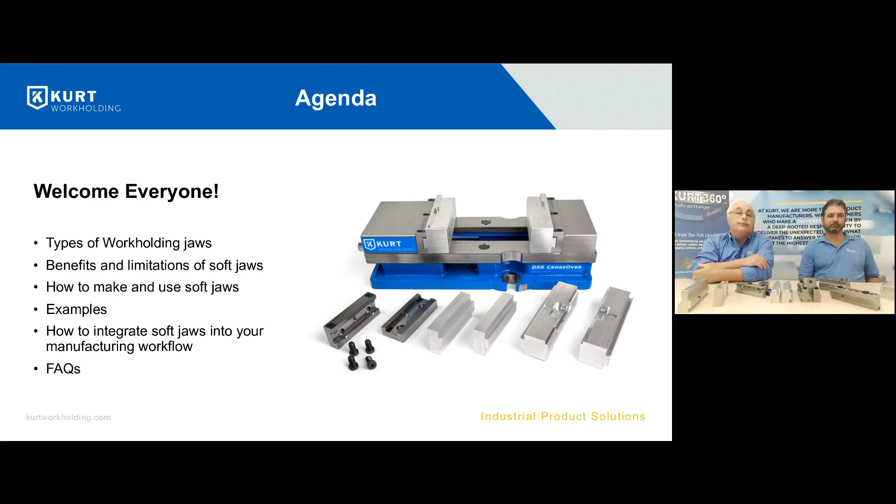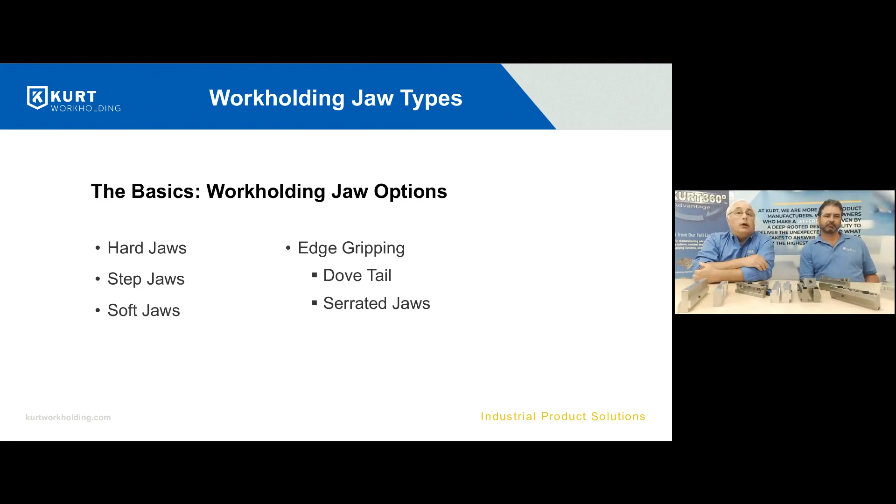So we'll start out with workholding jaw types. There's hard jaws, step jaws, soft jaws, edge gripping jaws, dovetail and serrated. In the next few slides we're going to go through and talk a little bit about those.

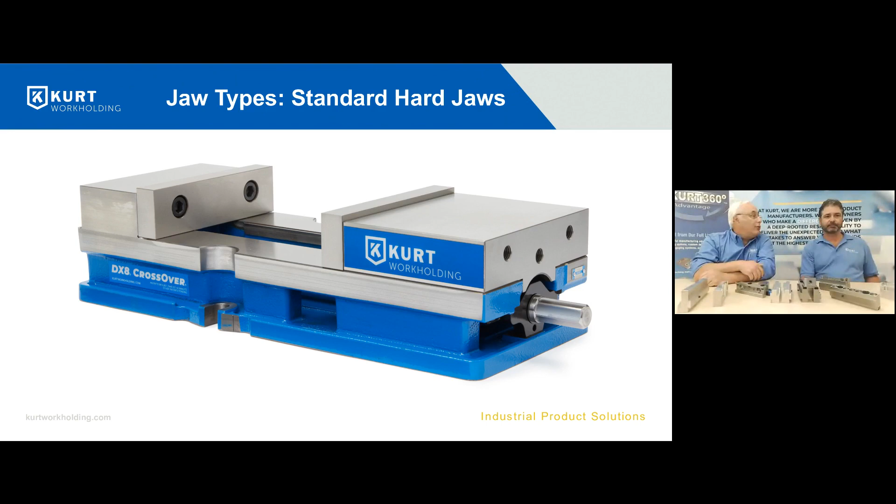First off is the standard jaw. It comes if you buy a Kurt vise, or a lot of different types of vices come with these style hard jaws. That's pretty standard use tool room, job shop type jaws. Most of the time they're used in conjunction with parallels. You'd set your part up on a set of parallels, and you would use some type of work stop system to stop your part left to right in the vise. Maybe square work for that kind of stuff. You necessarily don't need to use the parallels. You can drop your part right down on the bed of the vise, as long as you're not drilling through the vise or something like that.

So then the next type of jaw is a step jaw. We sell these style jaws. They're hardened just like the ones you get with your standard vise. The benefits of these are that the step is built right into the jaw, so no parallels. Parallels are kind of pesky, they tend to tip over, and you have to clean underneath them. There are things like parallel separators that we sell that hold the parallels against the jaws, and that helps, but it's still not as good as a step or a carved soft jaw. With parallels you always got to worry about getting something underneath them, where with something like this, you really don't have to worry about that. You still got to put a stop on it, left to right.

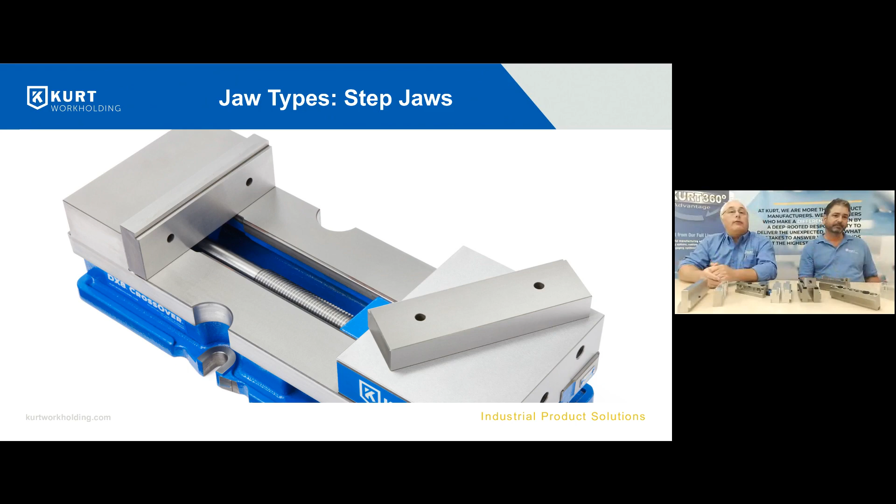Here's edge gripping - I'll talk more about this. We've got an example of a part I made in a process where we started with edge gripping, and dovetail gripping has become more popular. CNCs - I started this where we used to square up material, square up blocks. If you can grab onto as little material as possible and machine 5 sides, you don't need even a 5-axis machine to do it. Even on a vertical, establishing those 5 sides and getting the most critical features in that first operation is ideal.

Get your material a little bit bigger. You're seeing more and more of this. I'm going to show you an example - there's a picture there of edge gripping.

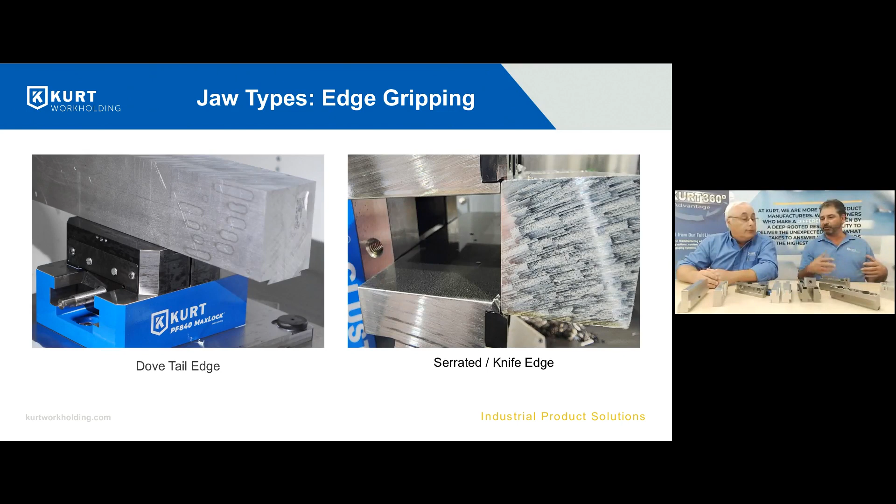That's a Talon, Mitee-Bite Talon grips, where we're grabbing into aluminum only a 1/16th of an inch. On the left-hand side, you see a dovetail prepped in one of our PF 5-axis vises. When you do the dovetail prep, it's a much stronger method - you can break tools before you rip the part out. But if you can get away without prepping it, and you're doing aluminum, that's ideal - it saves a step. On the right there's the serrated or knife edge, and then the dovetail. So I made a part and went through a process we'll show, demonstrating the dovetail end of it.

So let's talk about jaw type, soft jaws. This is a standard double lock vise that we sell. You can buy it with aluminum jaws, cast iron jaws, or hard jaws like you saw in that first picture. The CarvLock even integrates jaws directly into this vise - that's a new soft jaw vise, high performance for that one.

Anyway, with this vise you would carve those jaws to hold your part, be it round, square, funky shape, whatever - like carving a nest for your part. You see a little rectangle cut on the 2 movable jaws.

That's the no-carve zone - you can't carve into that area because the workings of the vise are underneath there. But that whole area all the way around, you can cut into to hold your part. So if you've got bigger parts, like 2 bigger parts, you can cut right to the middle of that and right to the outer end. The no-cut zone exists because we're pushing these jaws above the bed of the vise - that reduces jaw lift. If you push below the bed of the vise, you get more lift. So that's why we do that.

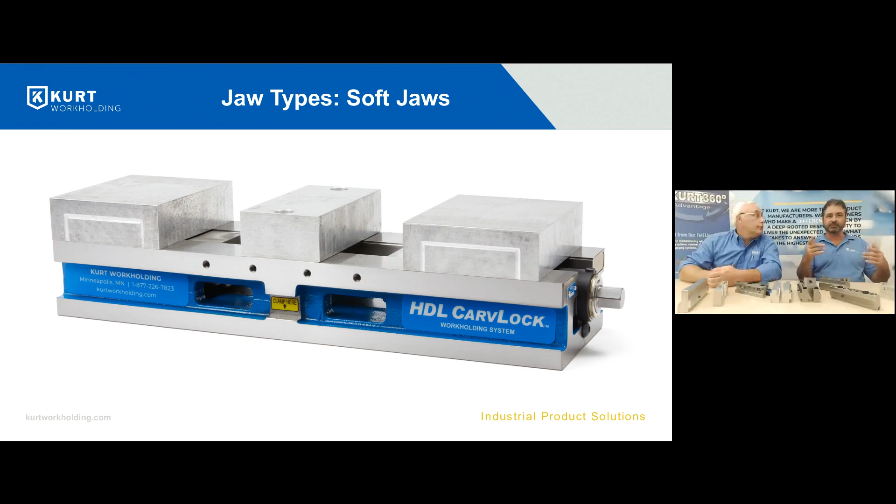Here's a picture of CarvLock Master Jaws, this is off of Instagram. Back in the old days, for round parts you'd get an indexing head, a 3-jaw chuck on your mill, or a collet closer. Now that CNCs are more widespread, you can just interpolate a round in a vise and clamp onto it. It's slick.

Soft jaws are a custom fit between your vise and your part, and parts aren't always square, so soft jaws are the way to go.

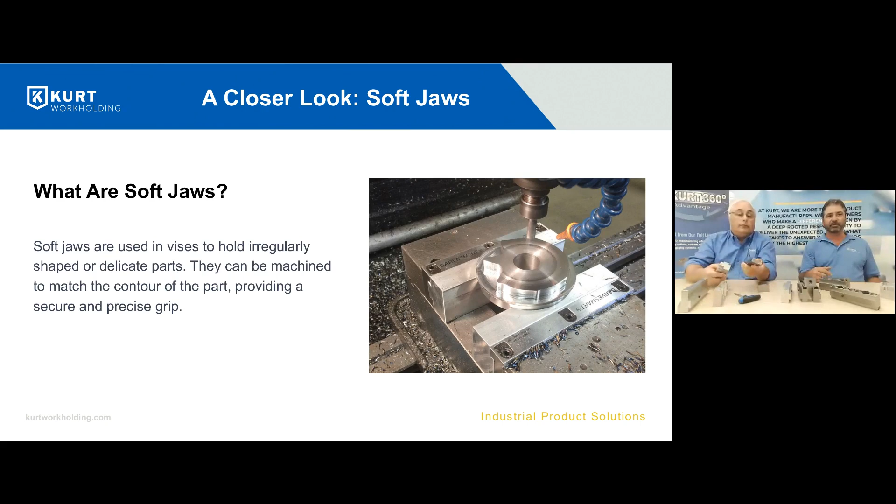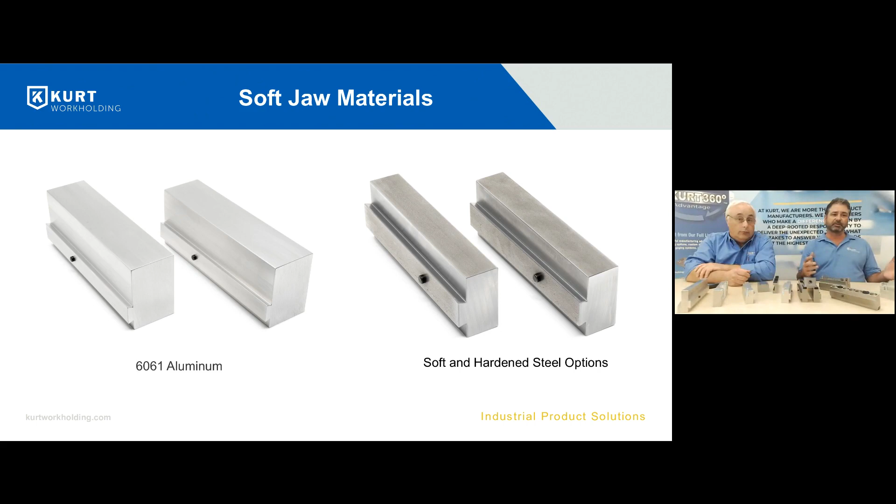I'll demonstrate that for you - I gotta loosen this up a little more. Here we're showing soft jaw material. Depending on what kind of part you're holding - aluminum for maybe a short run thing, steel, hardened steel - all different types of materials. It all depends on the type of work you're doing, and we'll show you some examples of that.

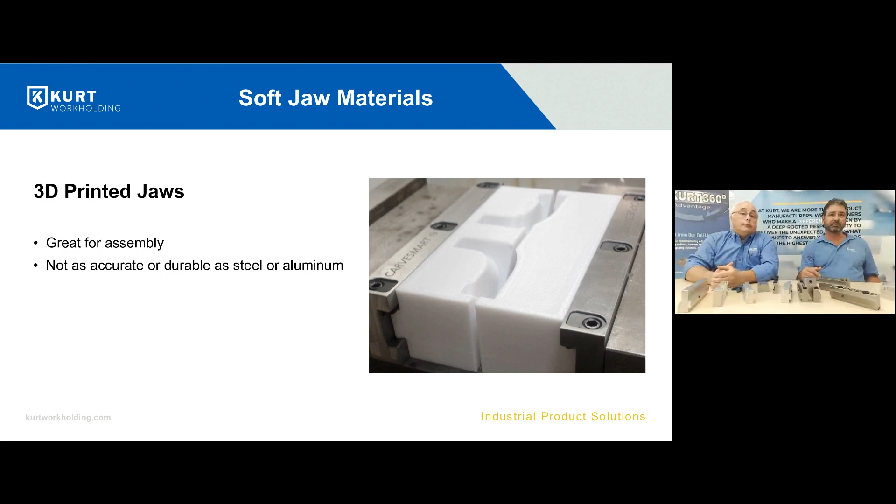When should you use soft jaws?

Not every piece works with soft jaws - if you're doing plate work there are reasons not to use them. But for even step jaws, I use soft jaws all the time, so that's why I'm a believer. Short run, long run - if you've got thousands of parts, obviously you look at custom work holding. But for prototyping, short runs, medium runs, soft jaws work great.

Even when people say this is going to be molded eventually - well, if it's going to be molded, it's usually not square, and they want prototypes, so you make them anyway. Here are some examples of hard parts to hang on to.

Simple ovals - that one on the right is a big blade that sticks way up in the air. You've got a good grip on it there, so it's a good way to machine a part like that. It's a tough profile too, coming out - it'd be hard to hold that in just a set of standard jaws.

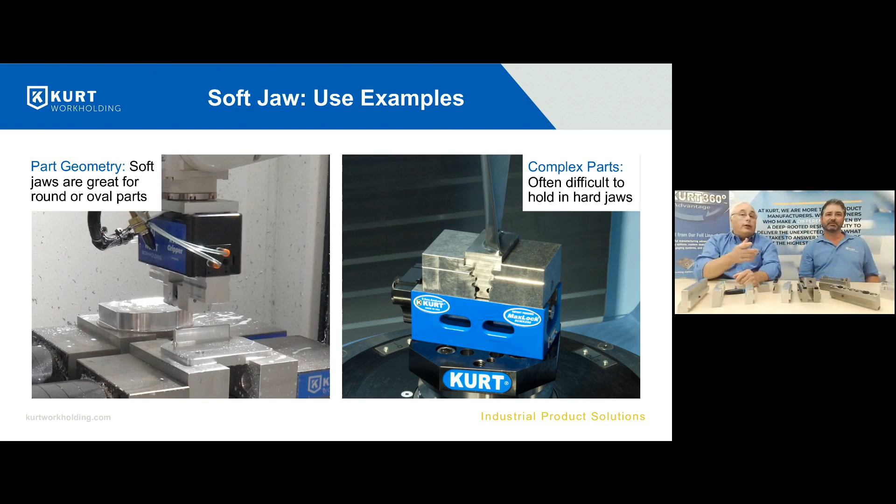We're going to talk more as we go about material for the jaws and so on, so we'll discuss that a little more.

This is a good example of the old school parallels with hard jaws and a work stop - I hate that setup. The one on the right is, of course, to make your soft jaws and machine the stop in there. The stationary jaw should have the stop built in laterally, left to right. I've got that right there - you can kind of see where we'll talk about relieving the corners in a few slides. But you can see the old vice and then the CarveSmart integrated system on the right, which is a great way to do it.

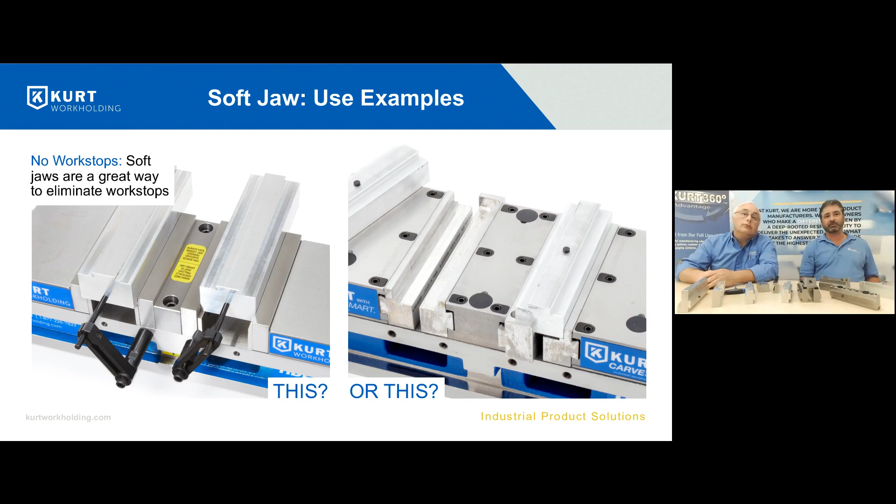I like that the work stop's built in - it's a positive stop every time. No chips under parallels, no chips, and it's easy to blow off the stop.

It works great. So I made a clamp here, and we took pictures as we went of how we set it up. These will end up being investment cast, or we wouldn't have made them this weird shape, but it made for a good example of how to cut soft jaws.

I've got a 300 millimeter Kiwa horizontal with a 4-inch cluster tower on it, where we put the CarveSmart Master Jaws. Soon we'll have the cluster towers integrated with the CarveSmart features directly in it, but I'm showing how we took this part from start to finish.

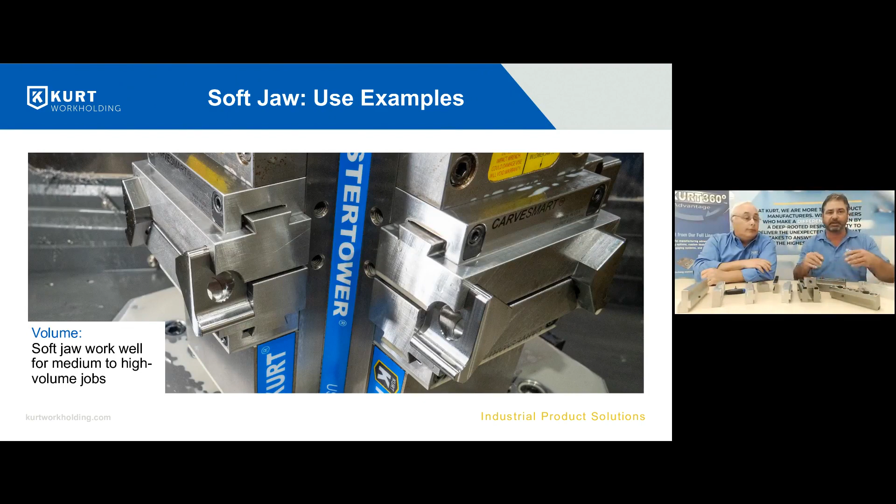These happen to be steel jaws - in fact, they're right here. These jaws that I made, I took them off, and I wasn't afraid to take them off because they repeat - they relocate, they'll go right back in, and I'll continue to run. So that's another great feature about these jaws.

We should talk a little bit about the pockets. On a vice, your movable jaw is allowed to rock - they're designed to rock 15 thousandths or so. If you put two pockets in like so, the jaw will actually rock so that it conforms to both parts. If one's slightly larger than the other, that jaw rocks and holds both of them tight.

Now if you put three pockets in this jaw, you might end up spitting a part out because you're only going to hold on two of them. Unless it's plastic or something where you can squish them a little, you don't want to do that. It's something to consider - don't get carried away making a whole bunch of pockets in the jaws. Think about one or two.

So the benefits of them: they're accurate - you've custom made a jaw to your part. They repeat - there's no parallels where you can run four parts and then get a chip on it and scrap the fifth part. They're rigid - you carve the features as deep as you can, get them in there as far as possible, so it's more rigid, and you wouldn't stick a tool out any further than you'd need to. And they're self-aligning - they only go in one way in a lot of cases. So it's a low cost solution to custom fixtures - essentially it is a custom fixture, but it's a soft jaw. It's a cheap custom fixture.

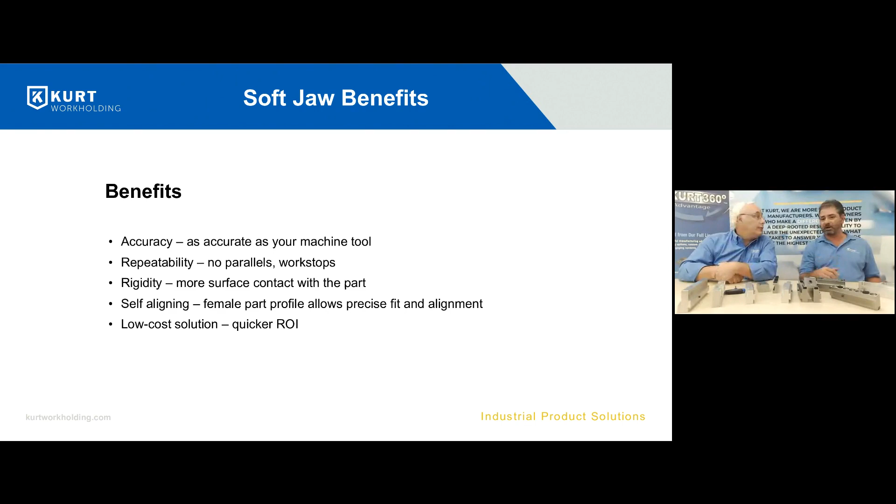That's the great thing about it - they typically don't take long or cost much to make. So does it make sense to use soft jaws? Well, there's times I think...

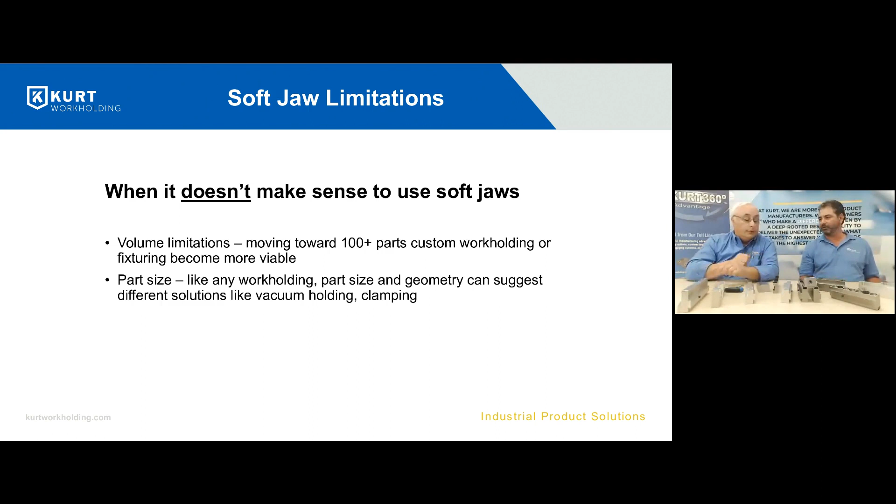But in a job shop, a tool room, when you've got vises, soft jaws are the way to go. It's quick and easy, and then you can determine if you want to go steel or aluminum. But when doesn't it work? Obviously for weird parts, big parts, stuff like that.

And how do you determine that? I always look at everything soft jaw first. So what are the part and job requirements? The first thing I look at when you're quoting something is, can I hold this in soft jaws? How am I going to hold it? How am I going to price it? So you go through all of that.

Am I running a bunch of steel parts, or aluminum? Are there going to be chips that get impregnated into the surface? That can be an issue. Then you want to go to something harder. How many are you going to do? What does it look like? And where am I going to go from there?

But I always look at it through the lens of soft jaws first. I do think the material you're machining and the life you want to get out of it all determines what your soft jaw is made out of. We make jaws out of aluminum, we make them out of steel, and you can go hardened steel - 50 Rockwell, 60 Rockwell. So you can do different materials for different applications.

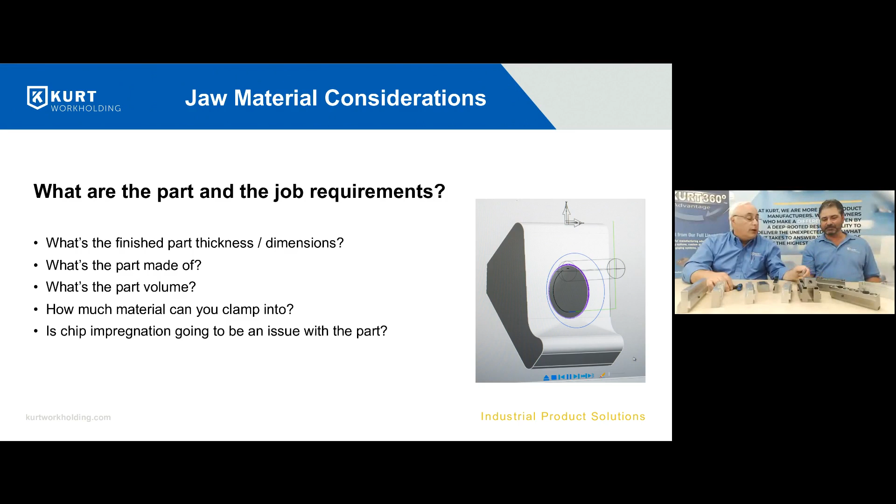This, I believe, was the AR400 - that's how it started. And we went to something a little harder, like 4140 at 40 Rockwell. You used a nice steel jaw to hold this because we're going to make a lot of these, and it's very tough, hard to machine. A lot of smaller, finer chips coming off would get embedded right away in the aluminum - even though you're blowing them out, they get stuck in there.

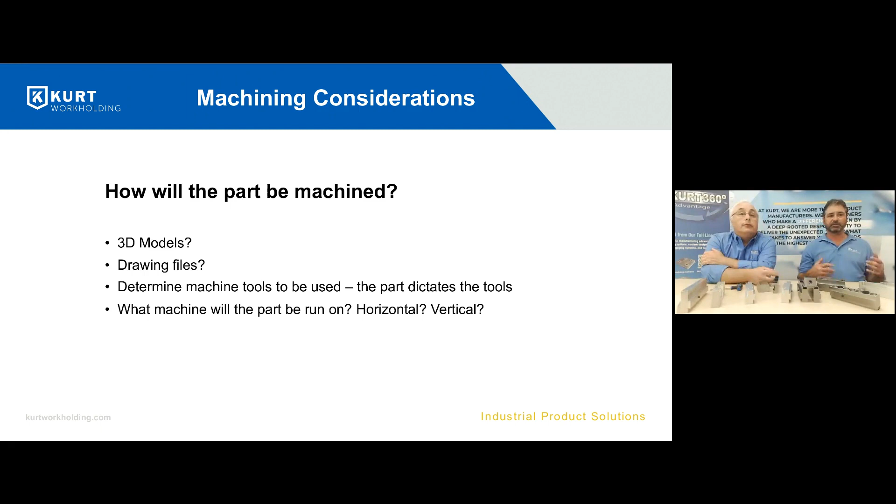How will it be machined? Am I going to get a drawing, a 3D model, or a napkin sketch from the engineers? Then what machine are you going to use - if you have the option to use a horizontal, can we get at it from a couple sides, or do we want to put it on a vertical? That's what you decide right out of the gate. And if you get a drawing file, you can easily make the soft jaws because you already have that geometry.

So now we'll talk about how to machine the soft jaws. We're using this part as an example - just a simple job we actually just started running the other day. So, how do you machine soft jaws?

You're going to figure out what you want to get at first, or how you want to hold onto it, to decide the jaw. Is the part 8 inches long? Is it 6 inches long? How big can I get into it in a soft jaw? So you decide on the size and determine the jaw opening. If the part is 8 inches, you're going to open them up 7 inches or so, put a shim in there, cut the feature, and drop it down in there.

If they're small like this, I like to hang onto as much as I can, so I use a smaller shim. When you do soft jaws, you put them in, clamp onto something - you've got to get that movable jaw rigid and locked in place, replicate the pressure you're going to hold on it, and put the shim at the right height in the jaw where the part is.

So for an example on this one, Bill, you would have your shim right in this area. I would, even where your part is, right? And you'll see I used 2 washers in there - actually I had 2 washers right in there. But yeah, what you want to do is when you tighten a vise, no matter what kind of vise you got, you're going to get some distortion.

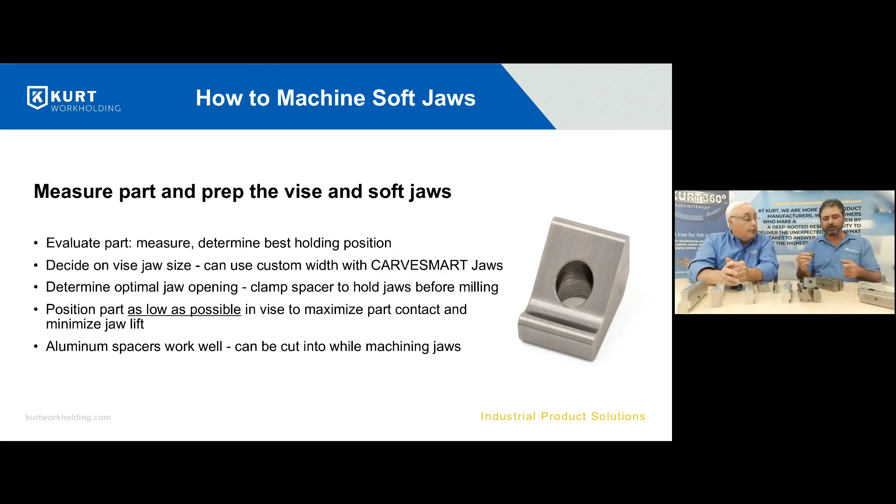Yep, but a lot of people will, like in this job right here, put a small half inch parallel on the bottom and clamp on it. And that's not the right way to do it, because then when they clamp up here, there's going to be a little bit of lift, so you want to put that shim up there. And then, like I said, don't just lightly clamp on it - clamp the same that you're going to do your part. That'll produce a better soft jaw.

So, and then here - excuse me - cutting the jaw. What I did, one thing, if you've got square corners in your part, it's very difficult to make a square corner unless you're broaching it into the pocket.

So I showed how I brought the drawing in here, but I used a half inch cutter to make these jaws, and you see that I relieve that corner - not as dramatic as relieving these other corners, but I put it on there.

I planned the gap - if you see the 2 lines there, I planned the gap on that one, so I didn't have to relieve that corner because that's in the gap. That's pretty smart. Yeah, a little thinking there.

And put that in there and just pocketed it out like that. And you want to use a square end mill - don't use a bull-nosed end mill on the bottom, because in the bottom of the pockets you want a sharp corner. In this case, I chamfered this 15 thou, which would allow for room for a radius in the bottom.

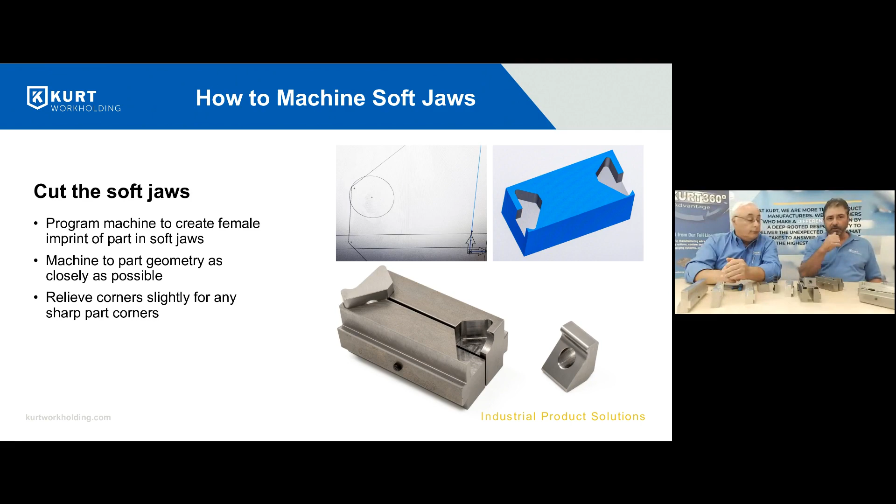But if you've got a 15 radius and you've got a square edge here, it's going to want to rock up. So you want to make sure that you get a square end mill, relieve the corners out, and have that square corner on the bottom. That's probably the biggest thing - you don't want any radiuses at the bottom of the pocket.

Yeah, and when you got a square corner like this, it goes into a pocket like that - it's got a place to go. Otherwise you'll be sitting off and you won't clamp your part the same every time. And it's a place for chips to go, so the chips don't get in there too. It's a better way to do it.

Yep, so when you're making soft jaws, essentially you're making a part to make a part. You'll see I grabbed a couple of washers. When you're doing your shims, you want to have something that you can cut into too, because you're putting them in the area high enough where the part is. That's what I like to do. So if I'm cutting aluminum jaws, I like to put aluminum or a penny or something that's not too tough in here. I used washers that I ended up cutting into and threw away.

But we're finding zeros, we're putting the soft jaws in there, and we're cutting the female feature in there. So here I'm just showing me setting it up. You didn't cut that washer away, did you? I cut half of it away - cut it half on each of them. Okay, yeah, you don't want to cut the whole washer out, or you'd have nothing, or a problem.

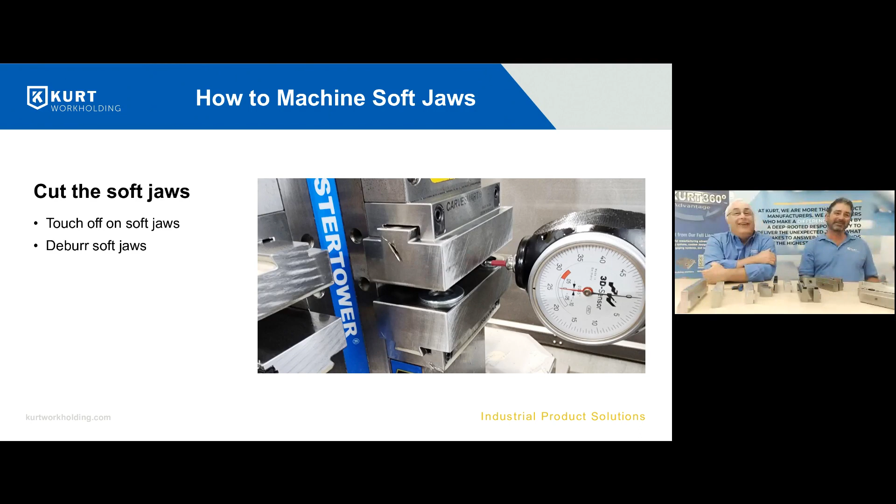You're not clamping on anything. Right, so something low cost.

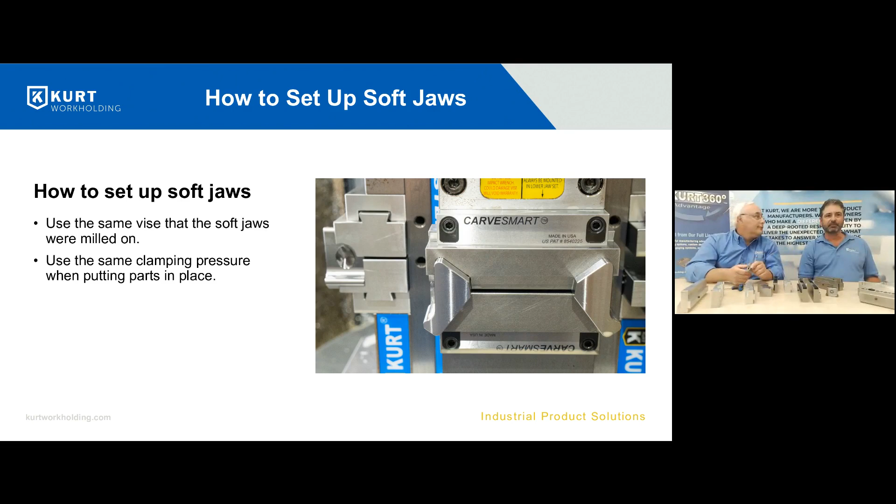Here Steve just showed you the jaws. So what I'm doing first is I'm taking a saw cut part and putting it into this operation to put the dovetail on there. That's just 60 thou deep. It's a simple dovetail, I use the 40-degree included. But what that does is it allows me to get that underneath this talon. And these talons aren't actually—they're more to bite, but they hang on to the dovetail.

And you can see that I'm 1.1 inches above in pre-hardened steel with a half-inch cutter, and haven't whipped one out yet. So I'm being aggressive. I'm not worried—they hang on. If you can grab onto a ledge like that, they hold on.

So in this first one here, relieving the corners out, I'm putting them in rough saw cut. I just hit them on the belt sander, then clamp them down, prep them. Then they go from here to there. So I think there's a couple more slides that kind of show the progression, that'll help explain this as we go.

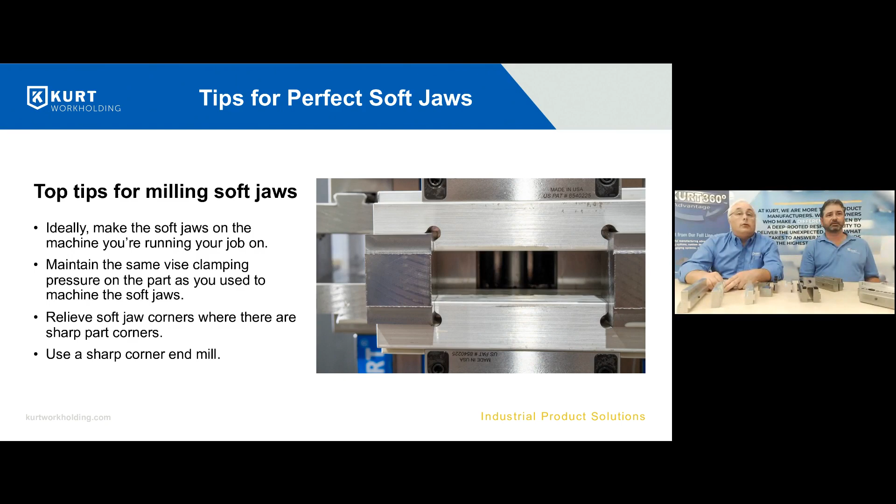So, and then the next slide here, we're showing—this jaw I made pre-CARVESMART, so more than a dozen years ago. It's a real jaw, I used it, I made parts in this. I had a job shop. And you can see 2 pockets—you can see where I did two parts here and 2 parts here, and a part here.

Ideally you hold 2 parts. If you're talking 2 small parts, which I did a lot of, the sweet spot is right where the cap screws are. Right there is where you want to hold the 2 parts, and right there is where you can't, because the cap screws get in the way—are you cutting into them?

So the CARVESMART system, once you get that in that master jaw, everything is machinable all the way down. You don't have to worry about it. You can put the parts where you want. So I prefer running soft jaws, a fresh one every time, but we do have the relocation feature, and depending on how many you're doing...

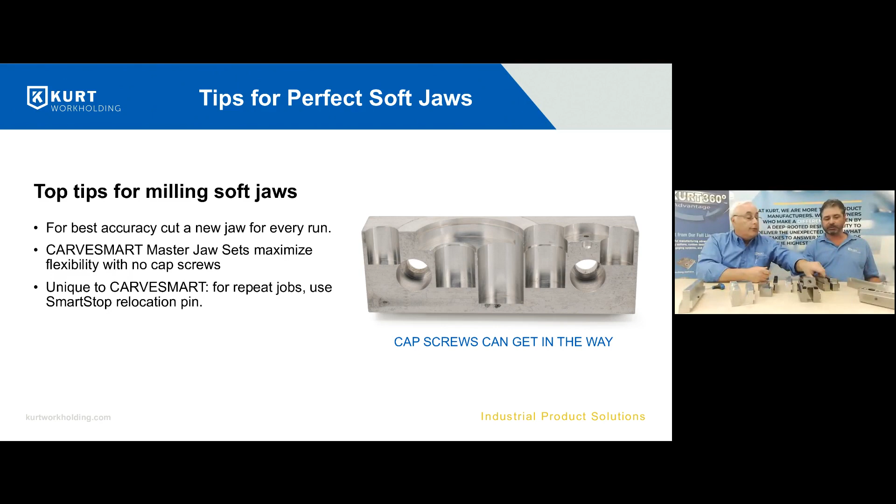These obviously I'm gonna save and reuse. They're gonna last and last and last. That's what that pin is for—it locates the jaw in the master, and that rests on the dovetail, so it relocates very accurately. And like you said before, something simple like this, you could do a dust cut on that again and take out any wear after you've used it. So just clean it up and reuse it again, or flip it over and use the other side.

So you buy a set of master jaws or aluminum jaws, what's that run about? Just roughly, these are $30 a set. So you buy that and you can actually run 2 jobs in it. This is pretty low cost fixturing. It is.

And the CARVESMART system, actually, we sell extrusions—you can cut any length you want. You can cut a 1-inch piece and put 2 1-inch pieces right here and hold one part in there. You can string vices together, and we'll talk about that a little later too.

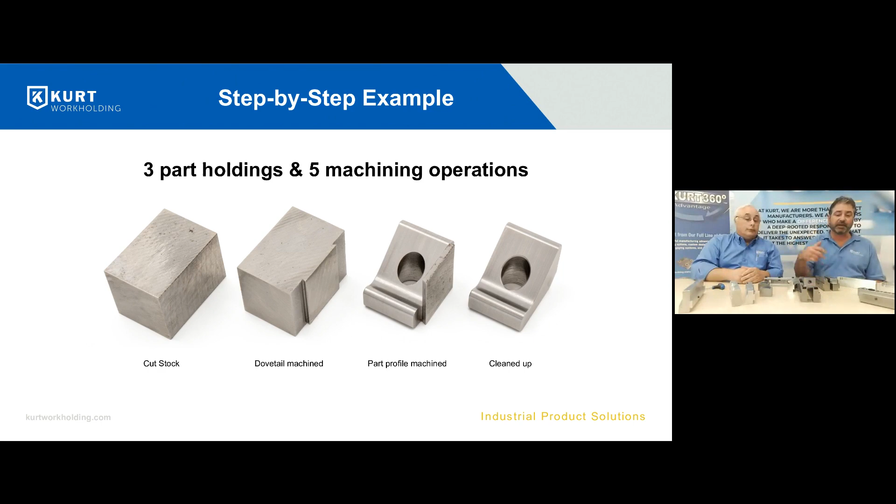But here we're showing this particular job, how we came from just saw cut—we put the dovetail prep on it, put them into the Talon jaws, and machine 5 sides, then access the one side and put the hole in it. I actually put the hole in it before I milled the feature, so I wasn't exiting out that 45-degree hole with the drill. Then we flip it over. So step 1 is using those jaws, putting it in there, getting the dovetail.

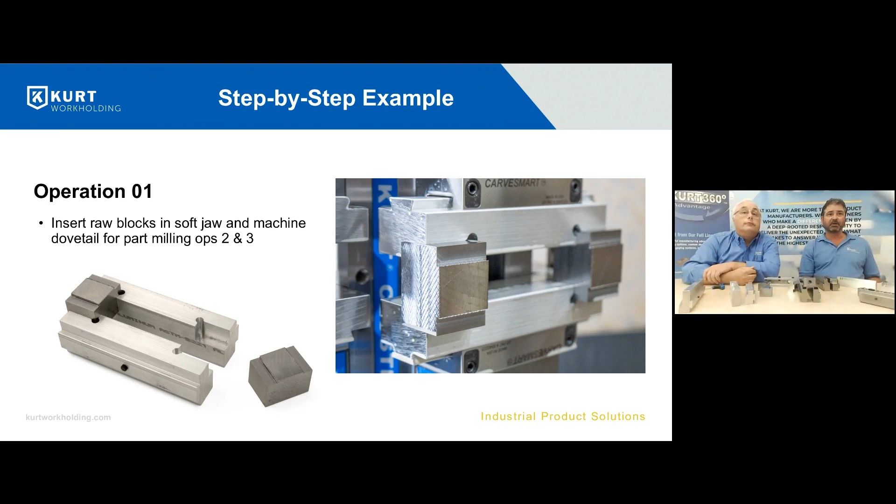If this was aluminum and I could get away with just gripping it with serrated jaws, I would omit this step. But with hardened steel, I want to make sure that I'm hanging on to it. I'm not winging it out or breaking tools.

And then of course on this, I have a tombstone, so it was great. I have everything set up, just the progression. I got 4 parts coming off done, which is nice.

Clamping on to the dovetail, and I'm using, like I said, I could have milled a dovetail jaw. I could have taken a steel jaw and cut a dovetail in there and made it that way. I like these Mitee-Bite Talons - we sell a ton of these jaws. These are the Versa grips on there for holding round parts. They work extremely well. So I'm clamping on to 2 of these with the dovetail.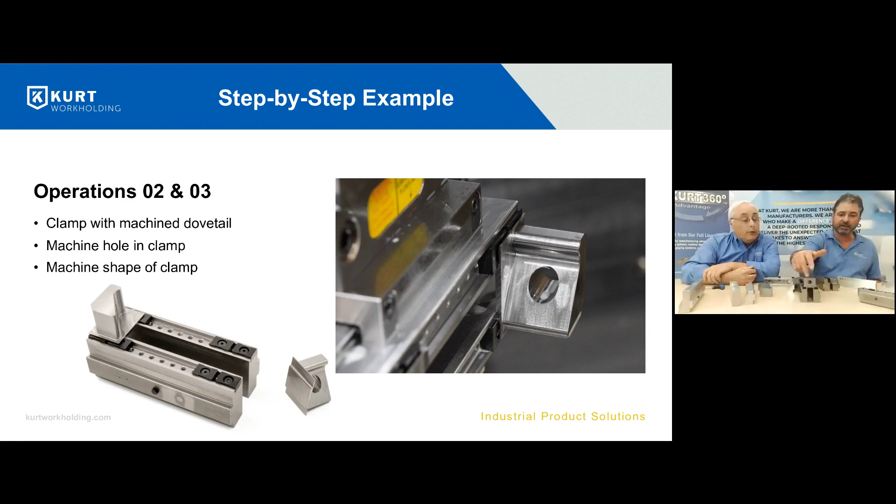I mill this side first flat, drill the hole, mill the perimeter, come back, chamfer that, chamfer the top, face mill, and then that step. So steps 2 and 3 are done in this operation. Works pretty good, it works slick.

And then 4 and 5, when we go ahead and put this in here and clamp on this, we machine away the top. And I don't just take a face mill to that, then bad stuff happens. I come in with an end mill, and I come in on top about 10 thou above, and I machine the perimeter of that, and that just rolls right off.

Otherwise, if you take a face mill to that, it'll tear it out of there. So once I get this off and it just falls off gently, then I take a face mill to the top, and then a 45-degree cutter around the top here. But then also I had access, and I relieved this out - you see that there - with a ball end mill, and I just danced around there. And then when it comes off, it's completely done.

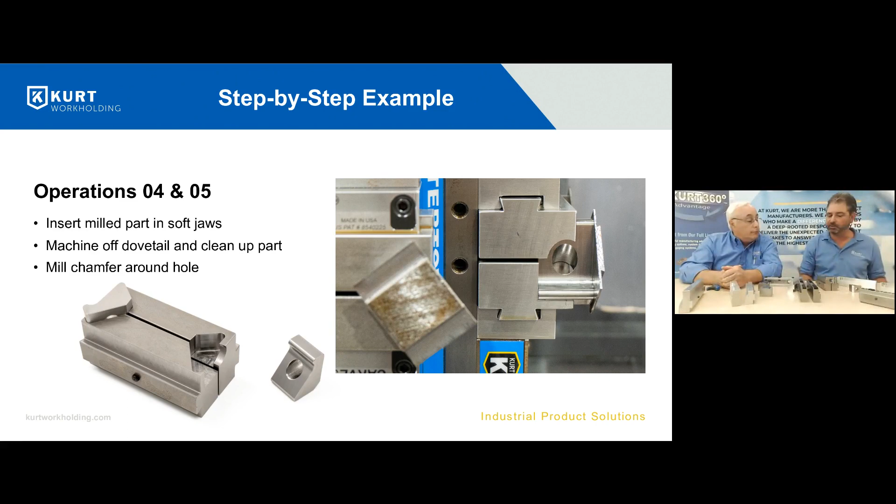Yeah, nice. And it works - like I said, these will be investment cast. We're not going to do this long term, but until we get that tooling made and done, we're going to do it this way.

Good. So soft jaws can benefit diverse shops, and we'll talk a little bit about the different types of shops and how they use jaws. We just broke everything into 3: big, medium, small, and we'll talk about them.

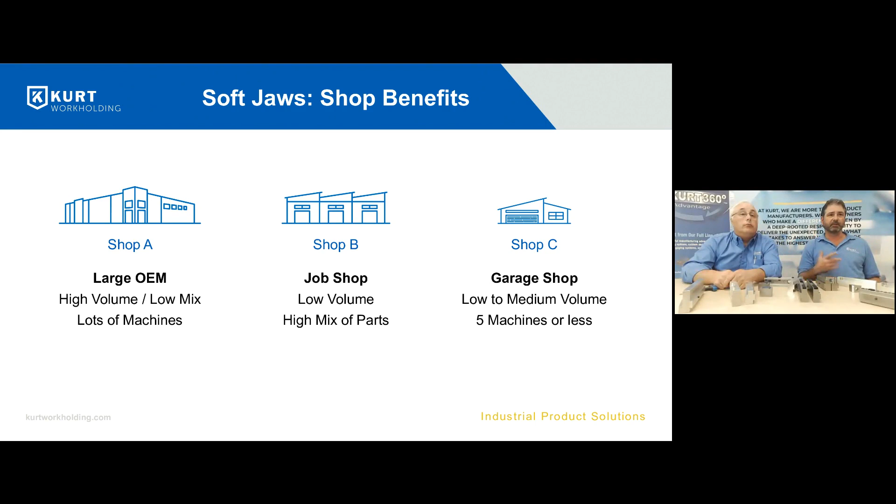So, like a large OEM shop - some of our customers, our customers' customers, are Facebook, Tesla, Nike, Amazon. You think about Amazon - well, what do they machine? Well, you think about, they got to have a maintenance shop, probably a full machine shop, and they're trying to fix stuff. So in their tool room where they're prototyping, where they're doing things, they're fixing things, they're making fixtures.

They're actually not as big a consumer as the medium-sized shop is, at least in my experience that I've found. But dedicated fixtures for a large shop - they're making components to build massive fixtures, or fixtures and horizontals and things like that. So that would be kind of the large shop.

You know, Kurt kind of falls in between A and B there - at least our division of Kurt. And we use them a lot in our tool room for prototyping, 1 to 10 off at a time. It's a quick setup, saves us a lot of money. Even we used to machine movable jaws and stuff at cluster towers with soft jaws on, and that's kind of how we make them.

So, and then the mid-size shop, job shop - that's what I've been doing most of my life. Has been job shopping, kind of the bottom feeder quote and stuff, trying to get stuff through the shop. But you know, the guy wants you to quote 1, 10, 20, and 500. But of course he doesn't want that - he wants the 500 piece price for the one part because he wants to try it.

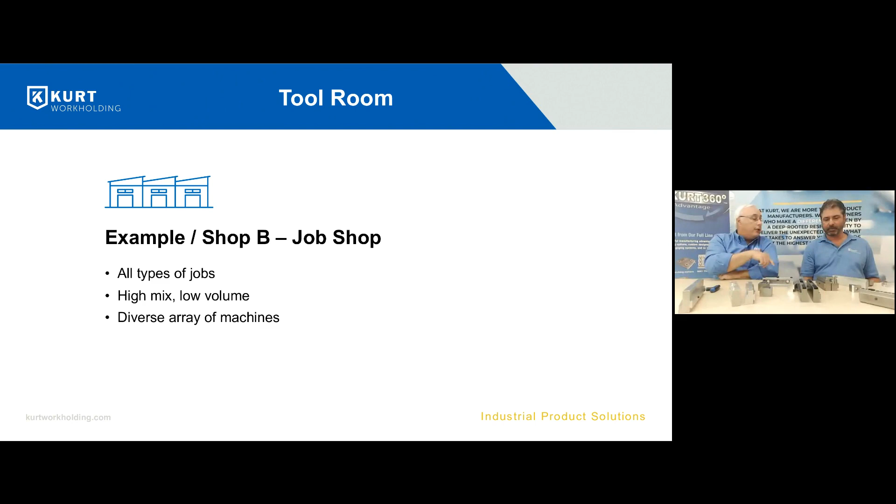Probably some of the same tools you're using to make the part. Then for the small shop, the garage shop, the knife makers, I've found with CarvSmart there's a lot of people making really cool knives and things like that. Little weld shops making key holders and things like that. Soft jaws are just a simple, quick, easy way. You can start with a vise and just cut that in there. We talked about assembly too. It works really slick, so I guess all size shops use soft jaws. All size shops can use them.

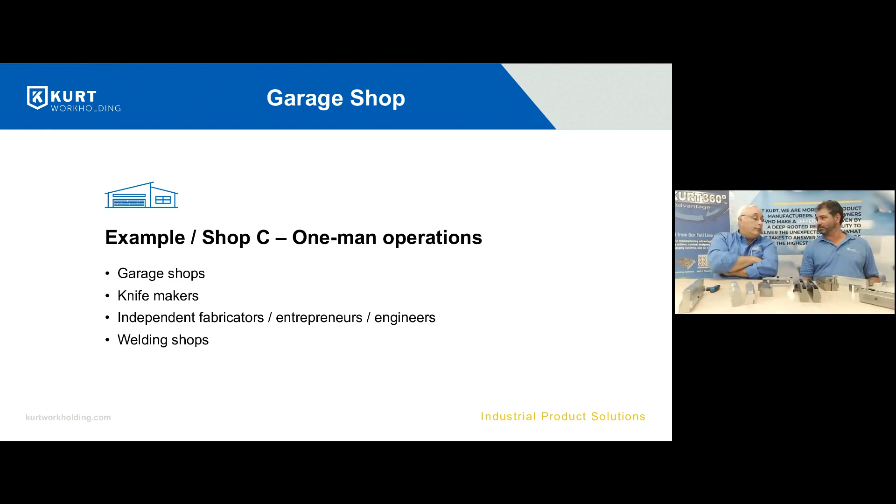Do jaws repeat when removed from CarvSmart and replaced, plus or minus 1/10? The way we make the CarvSmart is on the dovetail, so the jaws do not rest on the bed of the vise, they rest on the dovetail. Here's one actually with a pin. On the dovetail, we have 1 thou plus or minus 5/10 from the bed of the vise up, so in Z you can get a max of 1 thou, and left to right you're going to get 3/10. What we do is use a standard +1 +3 dowel pin. I have a Deltronic 25 pin quarter set, and I go +4, +7 won't go in, so we got about within 3/10, and our customers have told us it repeats just spot on.

Now, if you, like I like to do, number the opening that it goes into - I've got 2 vises on a Kitamura, an A vise and B vise, it's a double station Trilock, A1, A2, A3, A4 - I stamp my jaws. I go back in there and they're right on, absolutely right on. So they repeat really, really well.